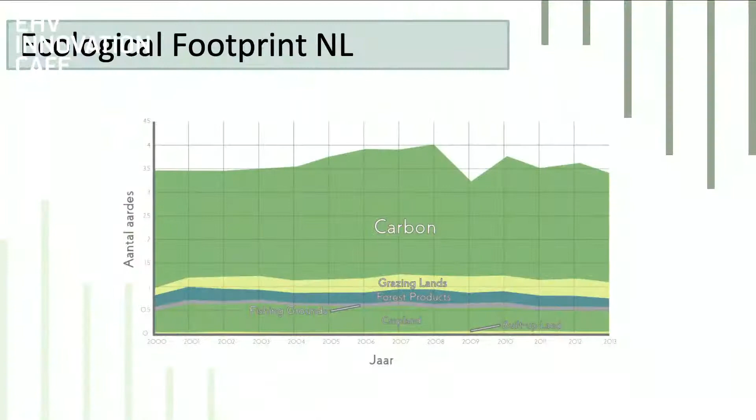If you look at the ecological footprint of the Netherlands, Dutch society needs about 3.5 planet Earths to sustain itself, and most of that is carbon. If you take away the carbon, we're just above 1 Earth. Different countries do a little worse or better, but on average it's pretty close to this for the whole world. So we're short 2.5 Earths, which is a bit of a problem because there's only one of them.

If you look at the construction industry, I'm going to be talking about a comfortable, affordable, sustainable alternative for Dutch social housing. 40% of all waste in this country is produced by the building industry. It's also responsible for 40% of all CO2 emissions. Worldwide, concrete alone accounts for about 8% of total CO2 emissions. So building needs to change.

So we started a student team a couple of years ago, and our mission is to accelerate the energy transition in the built environment, to get the academic world and companies to work together on innovating in that field. What we decided to do is create a comfortable, affordable and sustainable alternative for Dutch social housing, hence the name CASA.

So we're a student team. For those not in the know, a student team is a concept where at the TUE and other universities in the Netherlands, a bunch of students come together outside of their usual degree responsibilities and design stuff.

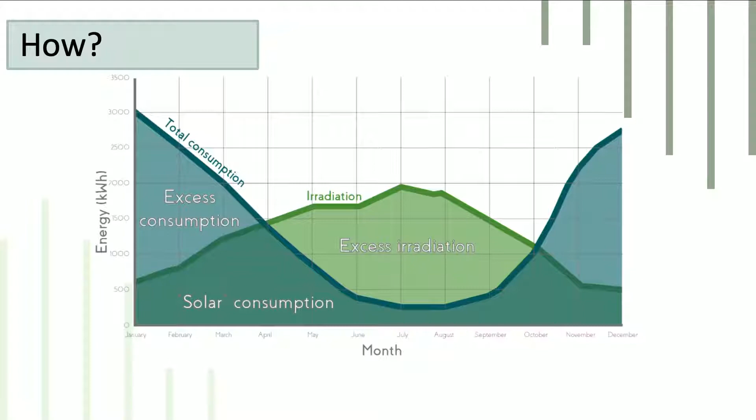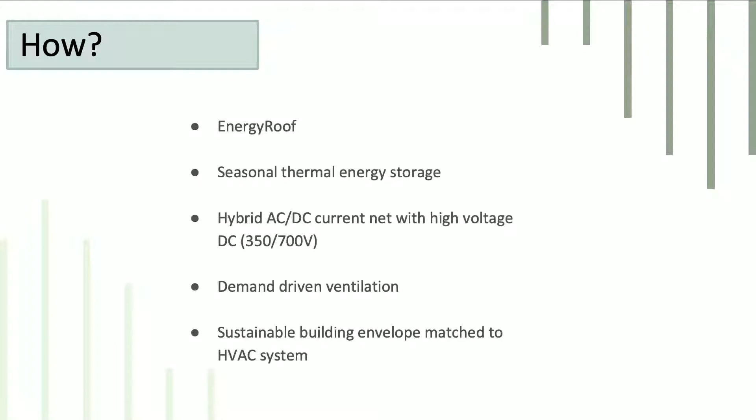So I'll start with the concept, and it starts with the installations. This graph is well known: in the Netherlands, in the summer months we have way too much solar energy, either as electricity or heat, and in winter we don't have enough — our consumption doesn't match the generation pattern. This is the essence of what we need to solve. Existing concepts basically slap some solar panels on the roof and turn on a heat pump, but this creates a problem because those panels are producing electricity in the summer when everyone else's solar panels are also producing energy and no one is using any of it.

And then on the other hand, in the winter, everyone is turning on their heat pump to use electricity to create heat when there is not enough of that electricity available. So you have this big divide, and you could say, well, I'll just sell my electricity back in the summer and buy it back in the winter. But somewhere in between, it had to be stored somewhere. Right now, the electric grid doesn't have infinite storage. So we said, we'll start with an energy roof.

We'll have a roof with solar panels on top that generates heat and electricity. I'll show you how in a second. We'll have a seasonal thermal energy storage that stores all that heat for a whole year. We'll connect it all together with a high voltage DC grid. We'll have demand-driven ventilation, and we'll design a sustainable building envelope around it.

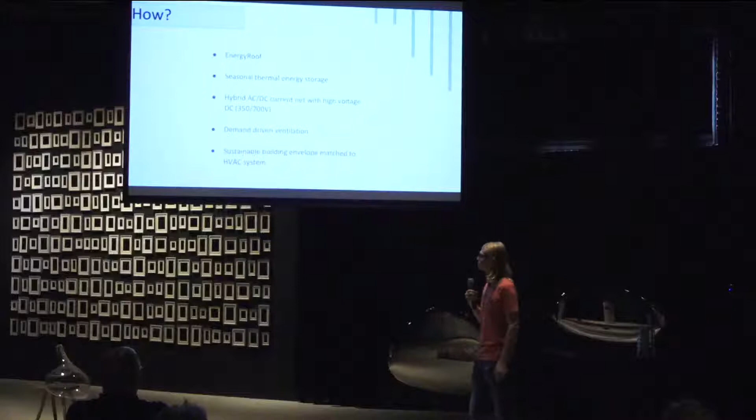I'm going fast here, and that's also how we went in the beginning, because we looked at what existed in the market and what technology was available, and thought, this list, wow, that's not so difficult. So four or five months, and we had this list, and we were pretty confident we were doing well. Give us another 12 months, and maybe we've built this thing. Not that easy, I can tell you.

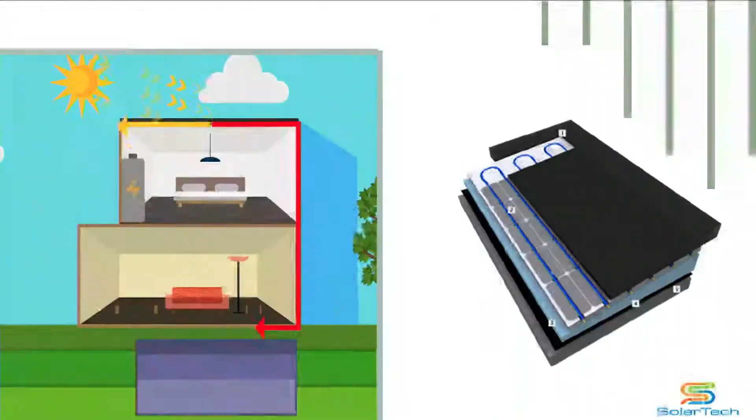So we started with looking for this generation system. We needed this roof that generates all this heat and electricity, and we found one pretty quickly. There's a company, their name is a bit cut off, but they're called SolarTech. They have this system, which you can see on the right, which is basically like floor heating, but on top of it, instead of a floor, you put a roof.

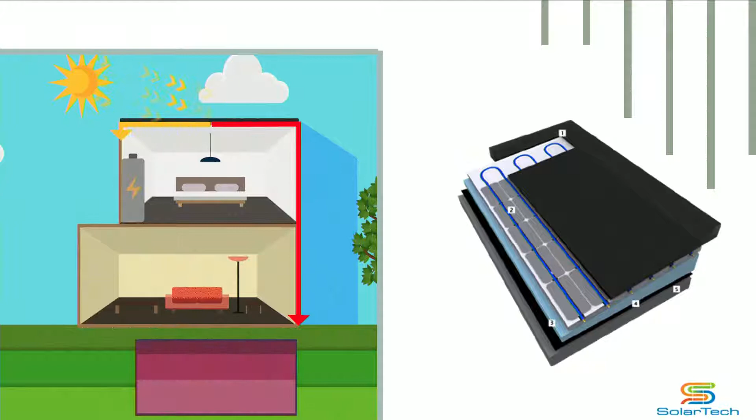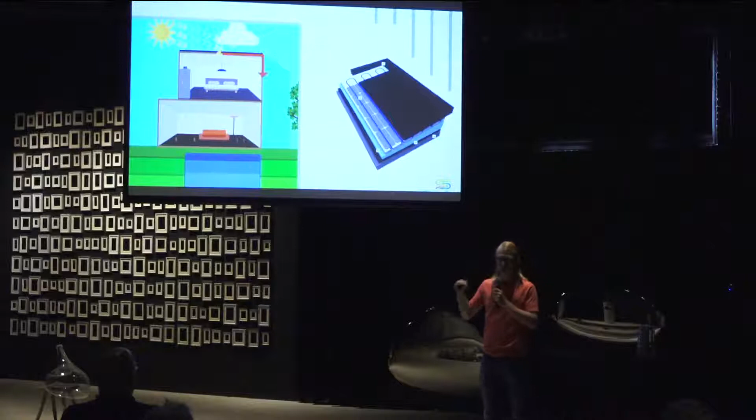And then solar panels, you lay them out on top, which is a really cool system, because essentially the solar panels convert as much light as they can into electricity, and everything else is converted into heat. So they absorb that heat into the floor heating pipes below, and we extract that heat and the electricity, and then we turn on a heat pump. This heat pump is on in the summer, and it generates really hot water, like 80 degrees Celsius, and we store that in a really hot seasonal storage.

80 degrees, yeah, so like scalding hot, yeah.

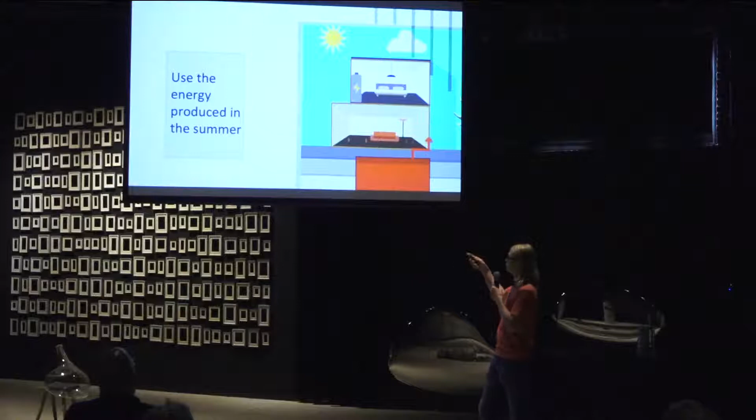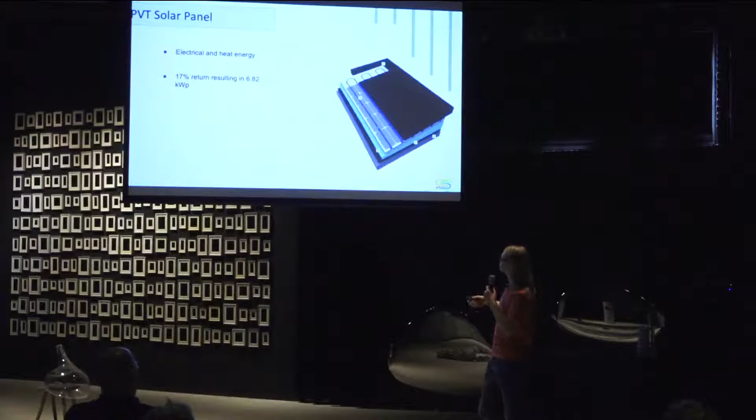And then the idea is, in the winter, we can directly use that energy with a very small, aquarium-type pump, to just pump it around and heat up the house. So as I said, you have this PVT solar, so you have electrical and heat energy. You can get fairly efficient solar panels that you can just smack on there. And this is what it looks like in practice.

And then this is where the story starts, right? So you put these solar panels on there, you put these pipes there, and in the drawings, you just connect those things together with a line. But in real life, unfortunately, you cannot just have lines connecting things. There's actual cables, and the safety wire and the earth ground, and oh boy, then you start getting complicated. Also, the roof cannot leak, so you want to sort of attach everything on the roof.

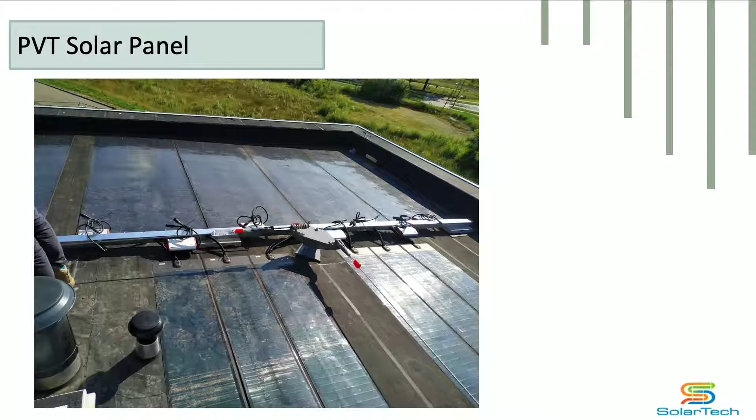Really, this is where, I can already tell you, the main challenges were not coming up with the idea of putting the solar panel and the heat pump working together. It's really about putting it together in practice. That was real difficult. The installer, the first time they saw our drawings, said yeah, this looks makeable, we could do this. And then they arrive in practice, and it's like, oh wait, this pipe needs to connect to this pipe, and then it gets difficult. I'll talk more about that in a second.

I also want to show you the seasonal thermal energy storage. It's really just a really big bottle of water. It's like a bathtub, but really big. It's like 104 cubic meters. And the reason we chose this is because it's simple, right?

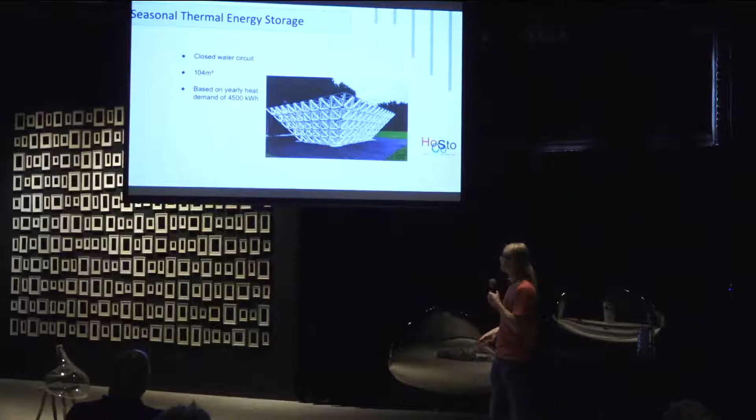If you don't need to do it complicated, then do it simple. So it's just a big box of water, a closed system, so it doesn't start rusting the pipes or break down. You make it so big that with a little bit of insulation, it stays hot for 8 to 9 months at a time. You can heat up this thing, and in the same way that a big cup of tea takes longer to cool down than a small cup, this very big cup of tea takes 9 months to cool down, so we can extract heat from it during the winter.

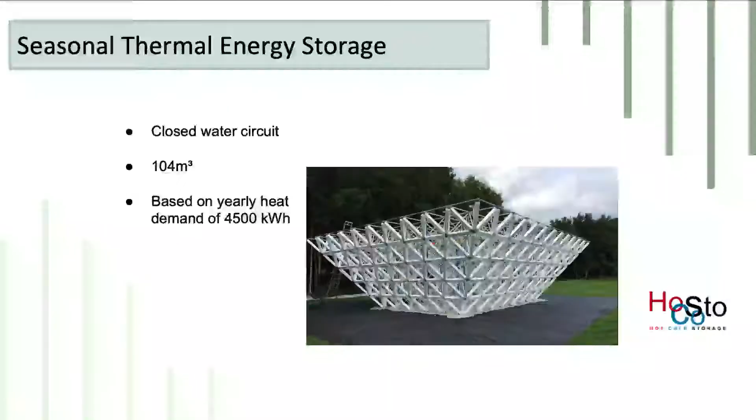You can see here how it went in the building process, some pictures of putting that thing in there. The picture they show to sell it looks a little bit simpler, because you see all those pipes there, they need to go somewhere. And our heat pump didn't come with the right connections, so we needed to put 6 valves in between.

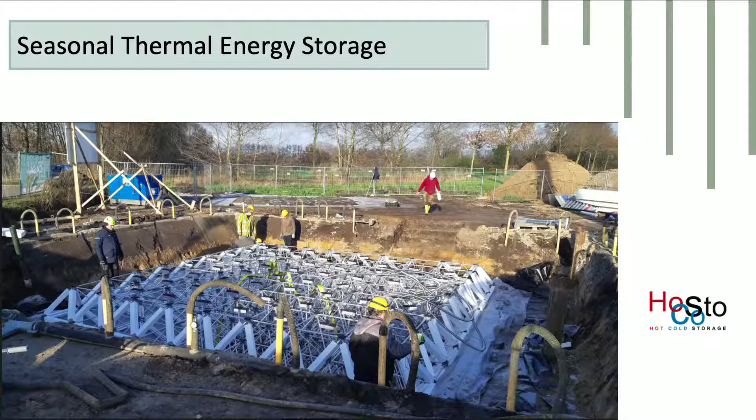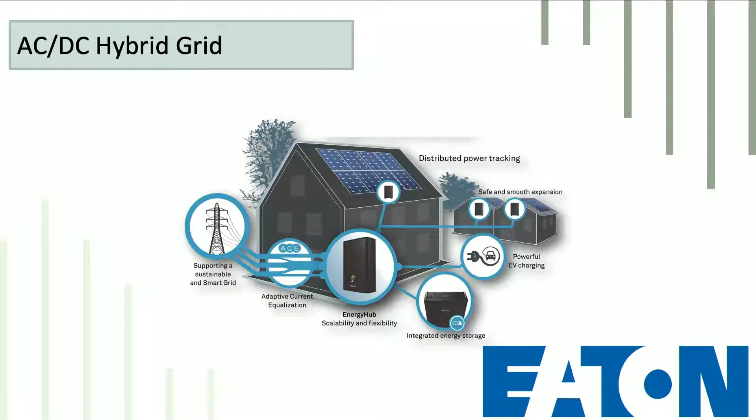The next one, one of the more complicated ones, is an AC-DC hybrid grid. AC is alternating current, that's what comes out of your electrical outlets. This was designed in the 1800s as the most efficient way of transporting electrical energy, and that's what all our systems around are built on today.

But after, let's say, the digital revolution, we started getting LED lights, batteries and solar panels, and all that stuff works on direct current. I'm not going to get into details, but it works in a slightly different way. The idea in principle is converting between the two types of electrical power, but you lose some efficiency. So we figured, we have solar panels which generate DC. Solar panels are just like LED lights, they're basically the same thing inverted: an LED uses electricity to generate light, and a solar panel does the exact opposite, it uses light to generate electricity. But they're both based on DC.

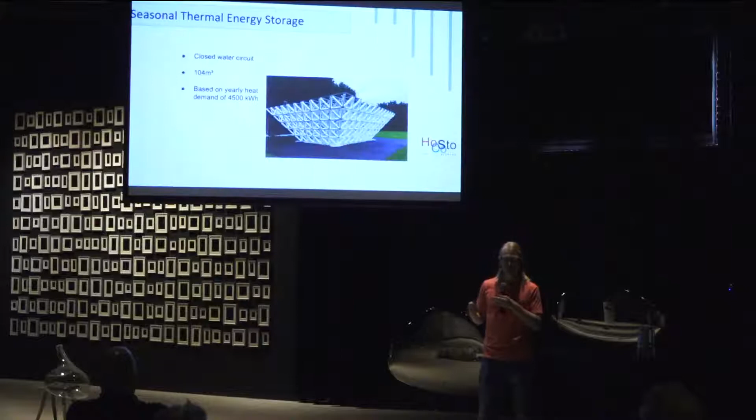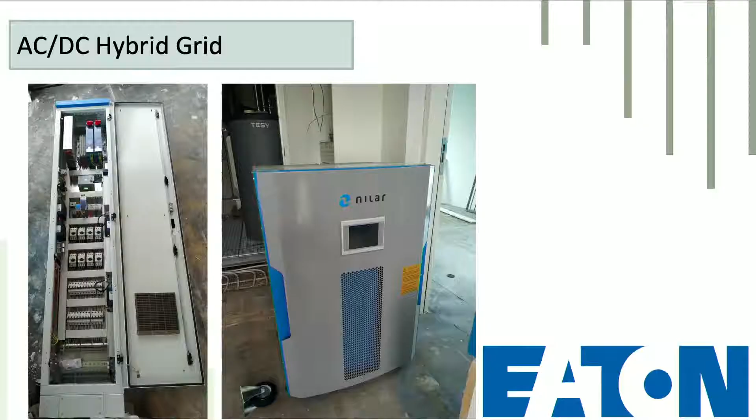Ideally also, you want some safety features, like if someone touches a live wire, you'd like the power to cut off and not continue frying that poor person. So while the idea in principle is not even that difficult, to get it all working in practice, you need like this: this box is 2 meters tall, and half of the components in there are just because of safety regulations and because things just don't always match together. That means it gets really complicated very quickly.

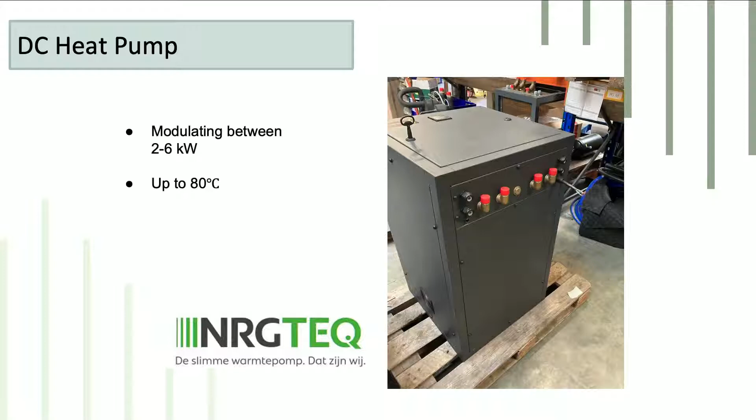That's the breathing, living heart of our building, because it's what makes it possible for us to use all that electricity and heat in the summer.

The first thing that's interesting: a heat pump usually arrives as an AC unit. You plug it into the wall and it uses alternating current. But the funny thing is, inside this machine they have a small converter, because alternating current runs at 50 or 60 hertz depending on where you live. But you don't always want your pump to run at that frequency, you want it to run a little slower or faster. So what they do is transform that alternating current to DC and then back to a different frequency to make the pump run at the right speed, which is a bit of a waste of energy because they end up having an inefficient converter inside the heat pump.

So we told the heat pump people: design us a DC heat pump. You'd think all you had to do was remove that one converter and plug DC right into it. Unfortunately this wasn't the case at all, because the internal control of this box goes totally haywire. In fact, when we first started, we figured we could put the whole house on DC. Why bother with AC altogether?

Most stuff in the house has a variable frequency. Like a vacuum cleaner, you can decide how fast it goes, so you're changing the frequency of the pump. Internally it needs to convert to DC.

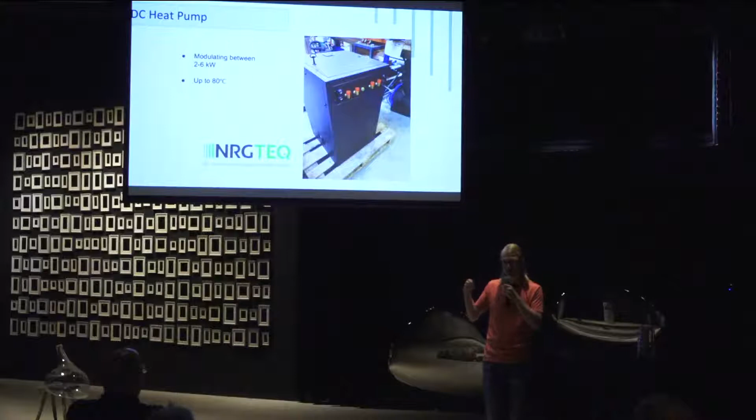In practice, unfortunately, the internal controls of these machines are all wired to respond to AC. So what happened is the machine worked fine, but you could never decide which washing cycle you were going to get - one time a cold cycle, the other time 90 degrees. Very inconvenient, and that's just one of the other challenges that came up. Again, on paper, looking at the schematics, you could just stick the 350 volts there, but in practice things are all interconnected in weird special ways and it doesn't work.

And so we get to the final list. We have a really complicated HVAC system: we have this energy roof that generates warm water and electricity, we have the seasonal heat storage, this hybrid AC/DC grid, and demand-driven ventilation - honestly that was the easiest part because they sell that as complete working systems, thank goodness. And then we have floor and air cooling, but we decided to leave the air cooling out for now because it's way too complicated. We're going to work on that later.

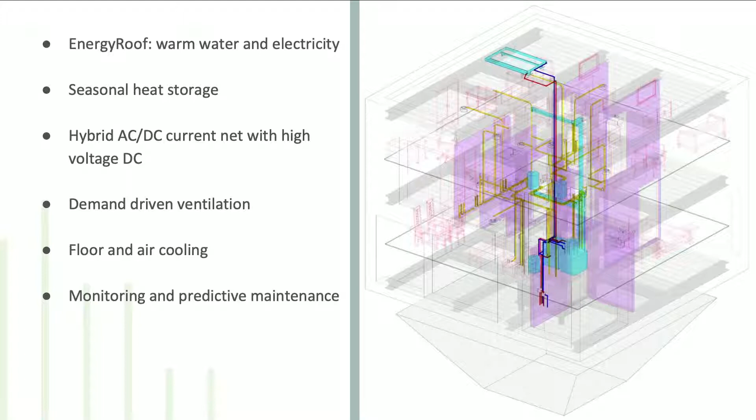But that's actually one important aspect - not really a problem we ran into, but a free bonus we got when designing. Remember I told you the energy roof generates warm water in the summer. Well your house, if you have floor heating, is in summer generating warm water for you, because you pump water through your floors and your warm room cools down while your floor gets warmer. So we figured if you're going to have floor heating anyway - which is a great efficient system for low temperature heating - then floor cooling is free. Because if it's too warm inside, don't bother putting all that warm water through your energy roof. Just send water through your floor and use it to cool down your house, because the heat pump is on anyway, so you get free active cooling.

Okay, so what the heat pump does is it transfers heat from a cold place to a warm place. It extracts heat from a warm flow, takes the energy out of it, and gives that energy to the hot side of the heat pump. So one side comes in, let's say at 30 degrees Celsius, like water coming from the roof. It extracts heat from that, and to extract heat, that flow needs to get colder, so it gets down to like 10 or 15 degrees.

So this is what our installation core looks like right now. On the bottom floor, in our test, we're building a test apartment building of two floors, just three apartments - two small ones upstairs and a big one downstairs. You'll see that in a second in the building concept. So we have this installation core running in the middle.

Where's the pointer? So you have the whole house here, and in the middle we've put all the installations. Because you've got to go from your roof generation system, to your heat pump, do something with it, and send it to your seasonal storage. And up and down the ventilation goes. So the bottom floor you can see here, and the top floor you can see here. And it's not even all of it in there - this is just the heating stuff. All the electrical components aren't even in there yet.

When you see this, you get pretty shocked the first time, because remember what I said in the beginning - it's supposed to be for social housing, which means not too expensive. But luckily, we came to the conclusion that if you look at all these systems, it's pretty silly to do this separately for each apartment. Because right now, what they'd do when trying to do social housing more sustainably is say: I'll have one heat pump, put one in every apartment, and they'll each have their own little generation unit, maybe even their own little solar panels and their own little converter system. But that's really a waste, because these systems are just much more efficient if you make one of them a little bit bigger.

And then what you get in return is you can add all this complexity, but since you're sharing it with so many more apartments - for example, we're doing 3 apartments, but to be honest, this system is big enough that you could run like 6 apartments on this one installation - then yes, you can have more complexity, but you divide the price by 6. So it gives you a little bit of breathing room to add all these systems. Because here's the thing, right?

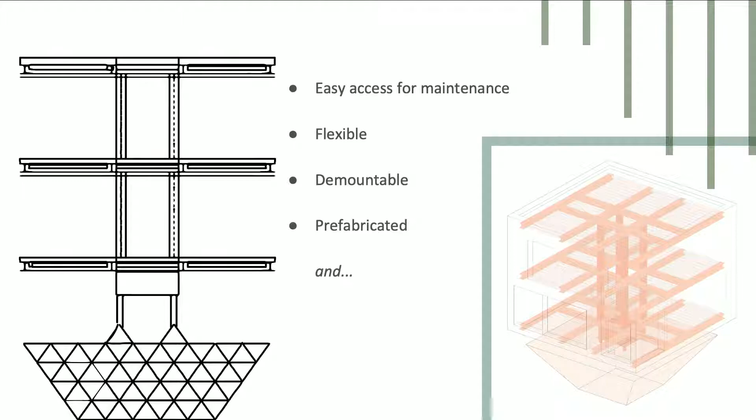Because, for example, if we were to take traditional concrete flooring and try to put floor heating and floor cooling in there with this system, you'd get a lot of complaints from people, because people will say, my feet are cold in the summer, but the rest of me is really warm, because this concrete floor absorbs all the heat but doesn't mix well with the air.

So we said, well, first of all, concrete is a no-go because it's really bad for the environment, and it's very difficult to reuse in any way. So we'll build with lighter materials, like wood, mainly.

Then there's this idea of storing the energy in the thermal mass. Instead of having all the thermal mass in the walls and floors as concrete, we'll store it as water inside our seasonal storage tank, which is right down here below.

And we'll instead build a flexible structure around it that is as light as possible, so that when you turn on the heating, unlike traditional floor heating where you'd have to wait a couple of hours at least for the room to get warm, this system would respond a little faster. This also means your floor cooling works a lot more efficiently, because it can actually react to temperature changes in the room.

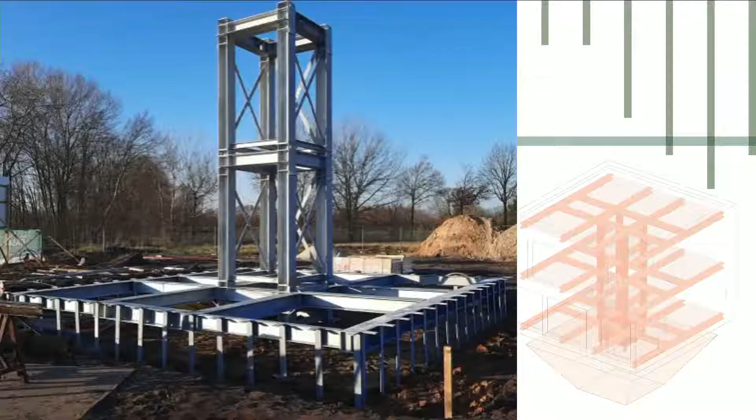So we started with this steel structure, which is the main frame. The reason the steel structure is there is mainly because we were afraid, when we started this pilot, that we'd have to move it around after it was built. But in essence, if you were to take away this steel frame, you could just build on top of this thing with a wooden structure as well.

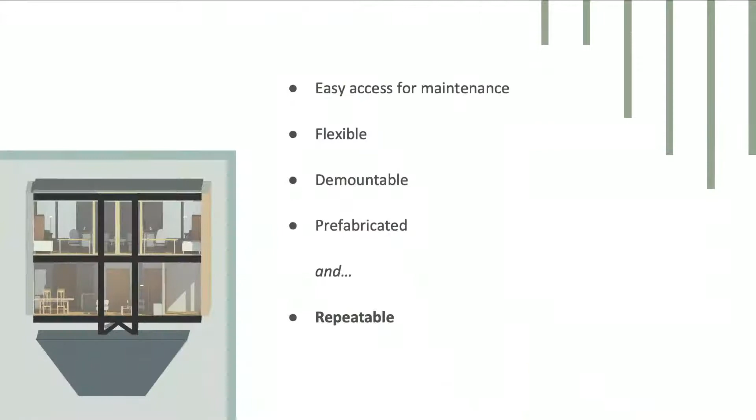Then, as we were going through the building process, the main thing we learned is that for the building itself, for building with wood and various materials, the knowledge is there in the market. But for the installations, we find ourselves being called ten times a day by various people on building sites saying, whoa, guys, you've got to help us.

Where do we place the sensors now? Where are they? What is it happening?

For the building, like the structural stuff around it, this knowledge is already there in the market. It's just that what you need to do to make it into a sustainable and affordable concept is make it repeatable. Because otherwise, if you do a custom building every time, you'll try to learn from old mistakes, but because the situation is completely different every time, you'll end up making all sorts of new mistakes. The best way to prevent that is just to make something that is repeatable.

You're saying the conclusion of my remark would be maybe you should make the same buildings everywhere. I don't think that's necessarily true, but it is good to have fixed concepts that reuse as much of the same ideas every time. Because you want sort of mass customization, right? But at the same time, you don't want to have everything completely custom, because then you run into the problem of, just like cars. Everyone can customize their car, there's many different cars out there, but many of them share the same frame. That's sort of a smart way of doing things, because car manufacturers generally don't custom make each car, so they don't run into making the same mistakes on each car every time. That's the mass customization route. How to get there is another topic.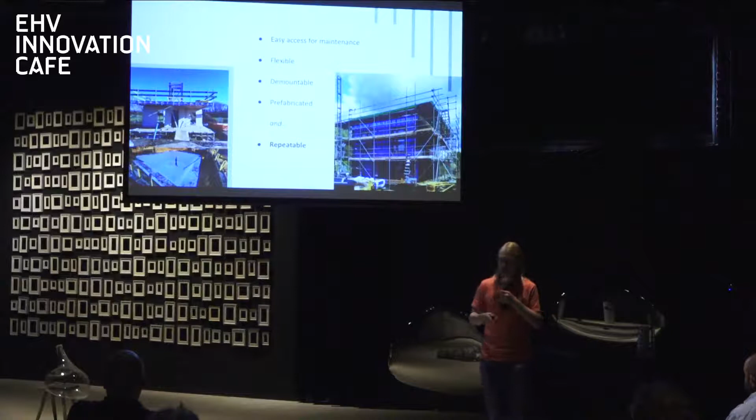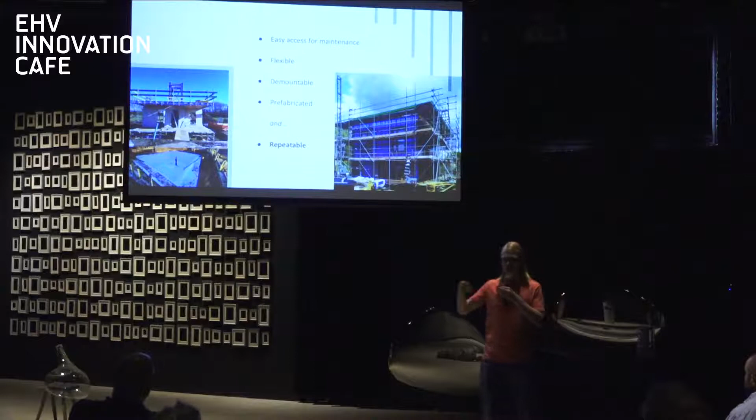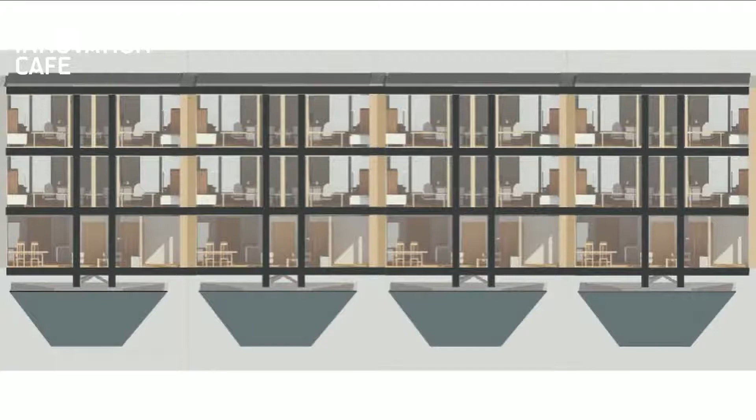So what we decided to do with the pilot is also try to create a building method that, besides just this first pilot, would also be repeatable afterwards. The idea is that if you take the existing pilot and put it next to each other and on top of each other, you get these blocks that you can play around with and create different geometries, but the basic building blocks are every time the same. So you can create more of a product for housing rather than doing it custom every time for a project.

This is especially important for the installations, because if you make the installations completely different every time, you'll run into different mistakes every time. So if you can standardize, that's where you can really get something nice happening. Like when you buy laptops, generally they produce hundreds of thousands of them, not ten. In the housing industry, sometimes we build ten houses and we never do that again.

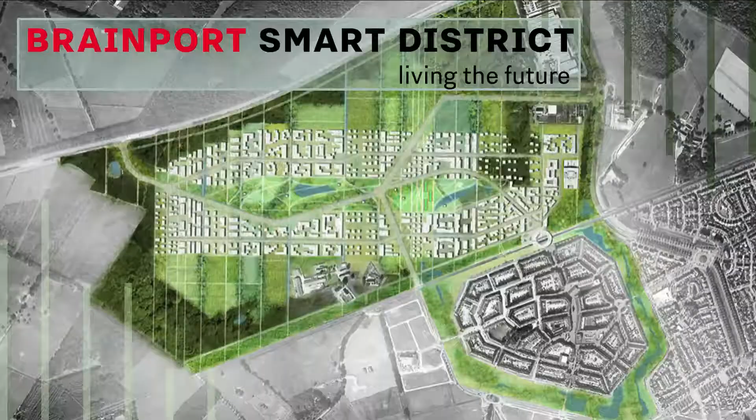Such a pity. Anyway, so the first one is the pilot that we're going to build in Brainport Smart District, which is just over—if you take the train to Helmond, the first station is Helmond-Brandevoort. They have a big Brainport Smart District planned right there, where they're going to build like 4,000 sustainable houses. We're building the first one there, so the very first CASA, right?

We're really the very first ones in that area to build, so we're like the guinea pigs for everything. It's not just that we're doing this pilot to get all the installations and the building stuff right—it's also about how do you make sure that, like the seasonal storage tank, do you need a permit for that or not? That was a good question. And the same for basically everything else, like you add batteries to this idea—does that make it fire safe?

What type of batteries do you use? Not lithium ion, that's way too dangerous. So we ended up going for batteries that you can put out with water, so the firemen wouldn't have to be afraid of using water when there's a fire in the house. But that was another one of those things where you can really go off on tangents. You start with this idea on paper saying we'll have batteries, solar panels, converters in between, and then as you actually go down the road of building and designing it, the firemen come by and say, that doesn't look safe. They have a point, so then you have to adapt.

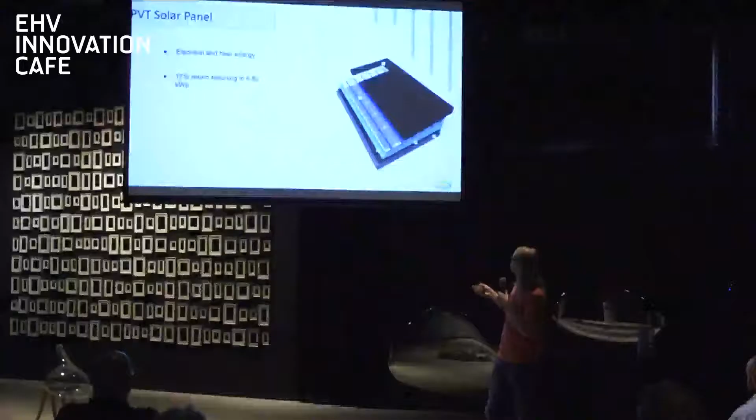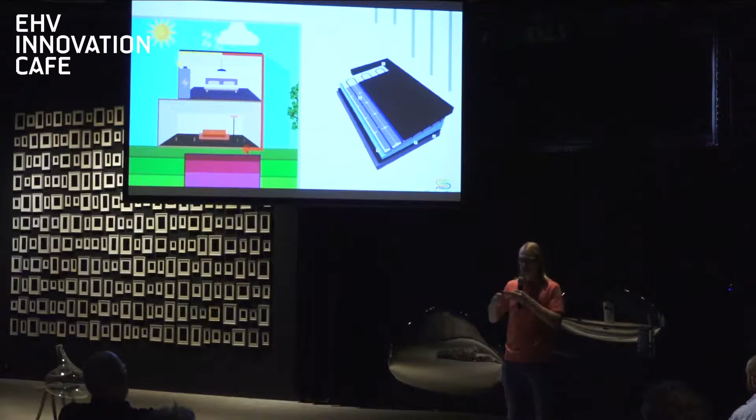Right now, this hot water line is running from the roof, but the more stuff you need on the roof, this also costs money. So one way you could save a little is to keep the solar panels, but instead of having them all over the roof, have a very efficient cooling system that makes it more comfortable for the people living there. If you can efficiently condition the whole room to a nice temperature via ceiling cooling, you can extract enough heat from the rooms to not need the full roof covered in panels. That would save costs and also be more efficient in terms of cooling the house.

And then the best part is, of course... the heating system works less efficiently when it's ceiling heating, but that's actually not true. Ceiling heating—so you're saying ceiling heating is more efficient? I always thought there wasn't much difference, because the first thing most people think is that ceiling heating would be much less efficient since hot air rises. But I know it's mostly radiation that heats you up.

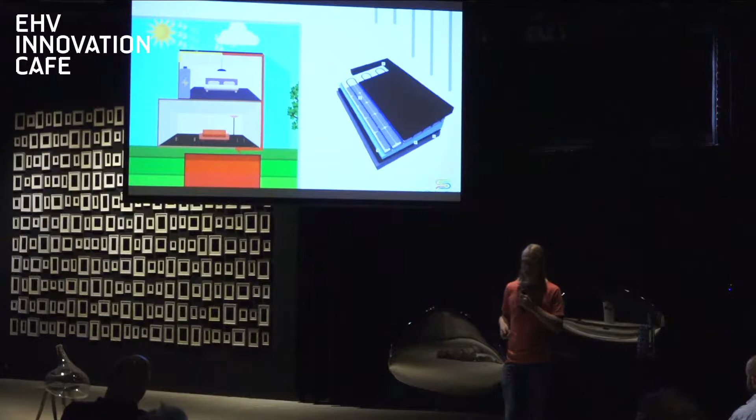Yeah, ideally, at low temperature heating... well, we'll talk about that later, that's very interesting. But essentially, if not too many people get headaches from it, I think next time we'd be using ceiling heating.

Again, this is one of those things where you try to change everything, but also try to keep the parts of the design philosophy that are as simple as possible. You try to hold on to those, and sometimes you conclude, a little too late, that you could have done it differently. To be honest, we do quite a lot of things differently, and it makes a lot of people very nervous. So sometimes I think it's good that we kept floor heating traditionally—not that it's a good reason not to change, which is why we're here. But we sure did make people nervous.

The firemen, we made them very nervous. The people at the municipality were very nice, but I think sometimes also a bit nervous.

We had some other ideas—there was a time we thought we'd use the seasonal storage. It looks like a pretty strong structure, so we thought we'd put the whole house on that, use it as a foundation. That turned out not to be a good idea, only because of the little connection pieces that come here—those end up sliding along each other, and it wasn't worth designing a whole new system for it. But this idea definitely made the people at the construction site very nervous. Luckily for them, we ended up not going through with it.

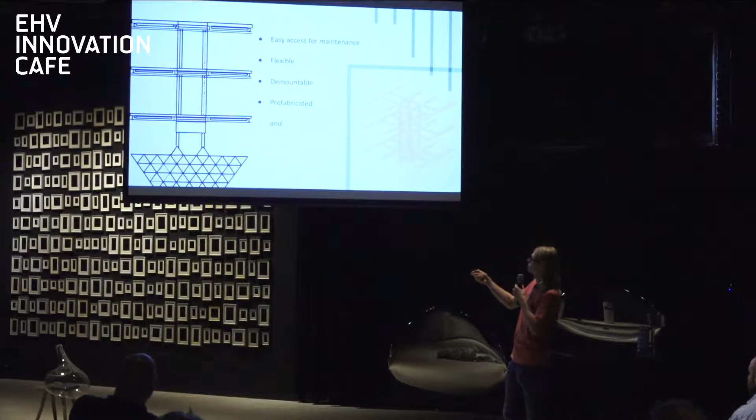But this idea of the central core—we have a steel structure in the center with the floors hanging out—the first time our construction engineer saw this, he was like, 'this is impossible, you cannot do it like this.' Of course, a couple of weeks later he was convinced that maybe you can, just not easy.

So we went ahead with it, with the idea that all of the installations would be prefabbed inside this core, arriving on-site ready to set down. Unfortunately, we learned as we went that the steel is, looks obvious in hindsight, way too heavy and bulky to put installations in beforehand. So we had to put the steel down, build a house around it, and still bring all the installations in afterwards. Next time, do away with these steel columns for installations and just use a little wooden box—much easier. So, well, we tried.

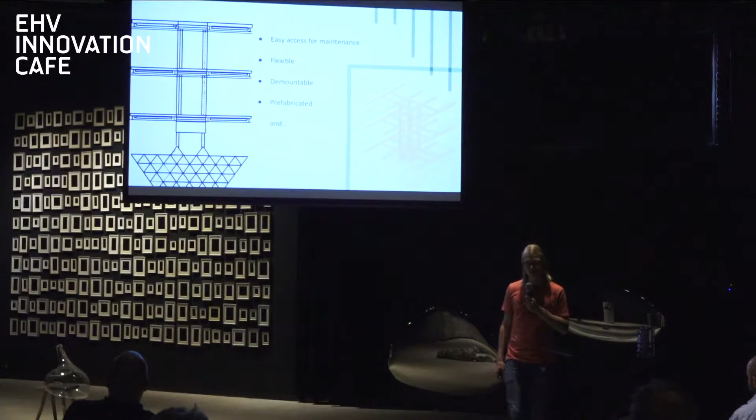Sorry, I didn't understand the question. Well, I'm looking for a dynamic where you don't have to be always dependent on documentation - where people more have models, so if someone leaves after training, the next one coming in can take over the role.

So you're talking about the challenge of continuity inside the student team, how do you make sure people take over the roles? Honestly, we have all sorts of things we try to do for it, but it remains an ongoing challenge as a team, especially because sometimes a student comes in, works on a piece, then leaves, and it takes a while before a new student comes in and picks it up again. We try to deal with that, but in the end, often the human factor is very important. We try documenting everything - we even have models of how the house works - but in the end, very often it's also that human factor of, but why did you make this decision? It's a tricky thing, honestly. But yeah, you're right, that's a challenge that's always there for us as a student team.